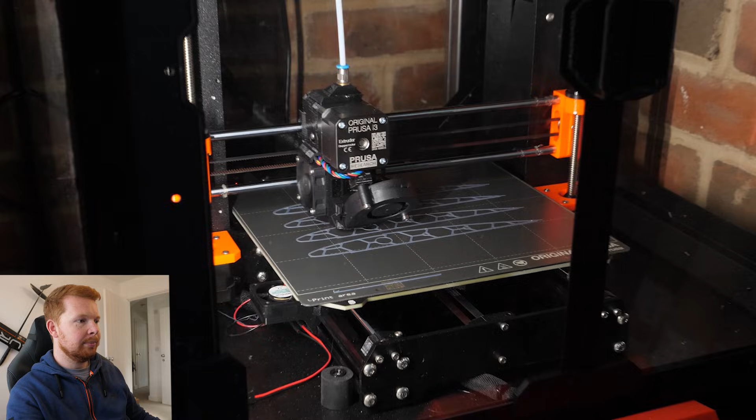Ever since then, I've wanted to build my own version, but a little larger. So I started 3D printing some lightweight aerofoil ribs. This is the first time I've printed with ABS in probably 5 or 6 years, and I was very surprised how well it printed on the Prusa Mark III in the enclosure. I didn't need to put any acetone or ABS sludge on the plate, which is what I had to do back in the day.

A lot of people were asking in the comments why didn't I use lightweight PLA? The main reason was the temperature resistance for when I iron on the covering film. But also, lightweight PLA is a lot more bendy and a lot weaker than ABS. I think it depends on the structure - if I was printing a more solid 3D part rather than a plate, then maybe lightweight PLA would be better. But for this, to reach the same amount of strength, I'd have to make the structural bits a lot thicker, so in the end it would probably weigh the same as the ABS.

Because if I printed this rib out of lightweight PLA, it would just be way too bendy. I have one of the test ribs here, see how bendy that is in ABS. If that was out of lightweight PLA, there's no way that would be strong enough. Good thing is with ABS as well, it flexes quite a bit before it breaks, which I think probably helped it during the crash at the end of the video.

Spoiler alert. ABS plastic that will make up the internal structure of a...

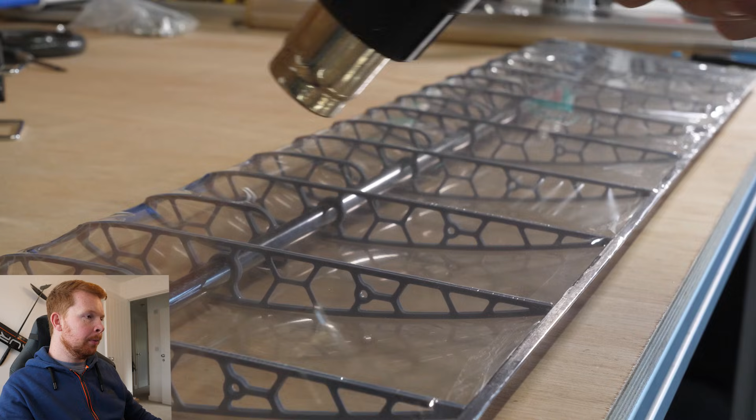Once ironed onto the ribs, a quick blast with a heat gun will shrink the film down to create a smooth wing surface. But there are some issues. The first being the ribs at the wing tip bend inwards due to the tension in the covering film. And this tension also causes the airfoil to shrink between the wing ribs, making an inconsistent profile along the wing span. Plus, I may have held the heat gun in one position for a little too long, causing the covering film to melt.

I just want to talk about wing design quickly, as this is the fourth air-powered plane I've attempted to build and fly. The first plane I built was actually the heaviest, but it isn't the heaviest now - this latest plane is actually heavier than that first version, which has a 2 meter wingspan as well. The reason for it is these wings are actually heavier than foam wings.

I reckon one of these wings is about 99 grams, just under 100 grams, so nearly 200 grams for the whole 2 meter wing. But I reckon I can build a foam wing that's lighter - I could probably shave off 50 grams. I reckon you could make a 2 meter foam wing with a 20 centimeter chord for 150 grams or less, maybe.

But the foam wing is very difficult to get a really accurate airfoil profile. So the reason why I went with this one, first of all, is because it looks cool, which for YouTube is important sometimes. But also the airfoil profile - I was hoping it was going to produce much better performance. It would be interesting to see if I made this wing as close as I could to the same profile but with foam, to see if it would fly, and if it would be much lighter and then potentially fly longer.

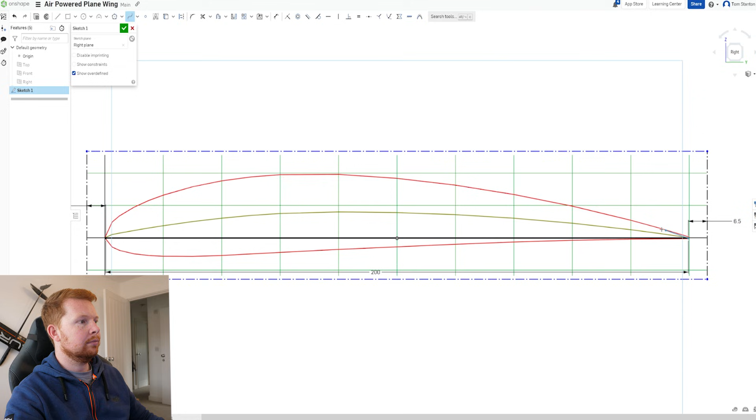To fix the issues caused by the covering film, I decided to use a thin sheet of balsa wood to reinforce the leading edge. This stuff bends really easily, and if you take it outside in the British weather, it'll bend even easier - so much so that I could bend it round a 3D printed mould of the wing and pin it in place until it dries.

Once dry, it holds the curved shape of the leading edge, and I can print some new ribs with a small step where the balsa will mount to. I then gave the wood a few coats of bright orange paint to make it look nice, which gave me some extra time to build a new wing structure.

This new wing is similar to the previous one, but has much thinner ribs, as I'm hoping the balsa wood will add some strength. It was a bit frustrating that I had to add these rods - it's part of the structure anyway, but I had to add these thin 2mm rods. They don't weigh a whole lot, maybe one of these is like 3 grams, so about 6 grams for 2 of them. I'm not sure, I can't remember.

They don't produce any span-wise strength along the span of the wing. They're literally just for compression reasons, to stop those wingtip ribs bowing inwards from the covering film, which is kind of annoying. You wouldn't need it on a foam wing, but I guess it's just a necessary part of the wing structure, as well as some thin carbon rods to prevent the wingtips bending inwards.

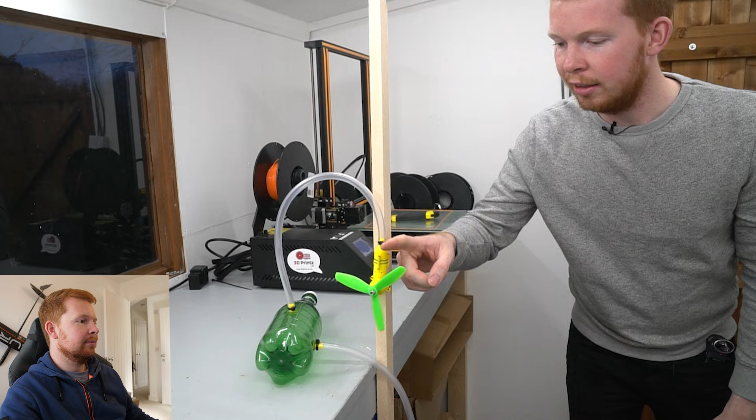Fortunately, I've been developing 3D printed air engines for a while now. I find it so funny watching this old footage back - I know I include it in quite a few videos, but basically that first version engine I managed to get running one evening. I blew into the top of the cylinder head, and it managed to run, and I was like, I need to quickly get some footage of this. So I grabbed that drinks bottle from the cupboard, cut 2 holes in it, glued some pipes to it - the absolute worst way to use a bottle as a pressure chamber. I didn't pump it up above 30 psi or so because I was scared it was going to burst at the holes I'd cut. Then the engine was attached to a random stick with some wire. But yeah, it's just funny looking back at that.

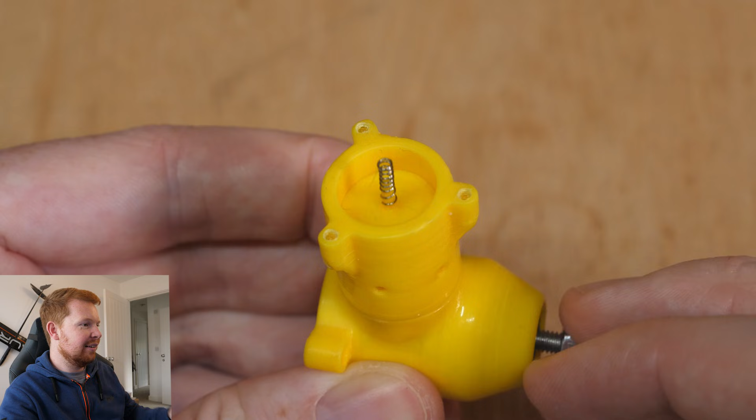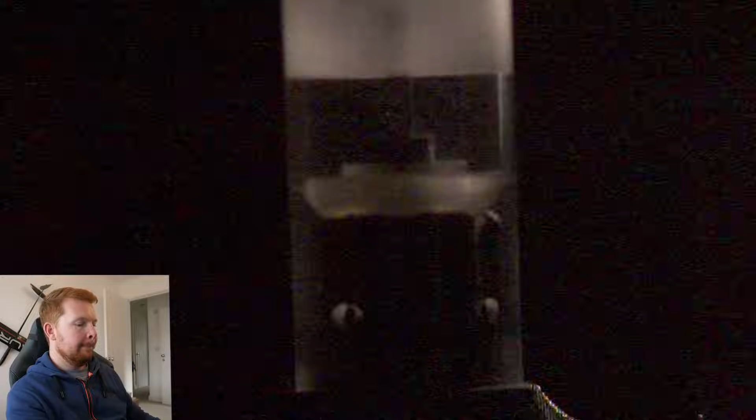I've tried many different designs such as spring-operated inlet valves, cam and pushrod valves, diaphragm actuated pistons, and the latest design that uses a custom moulded piston seal that expands under pressure to make the piston airtight, very similar to the Airhogs engine. This engine has been a huge step up in performance compared to my older designs, producing 350 grams of thrust from an engine that only weighs 40 grams.

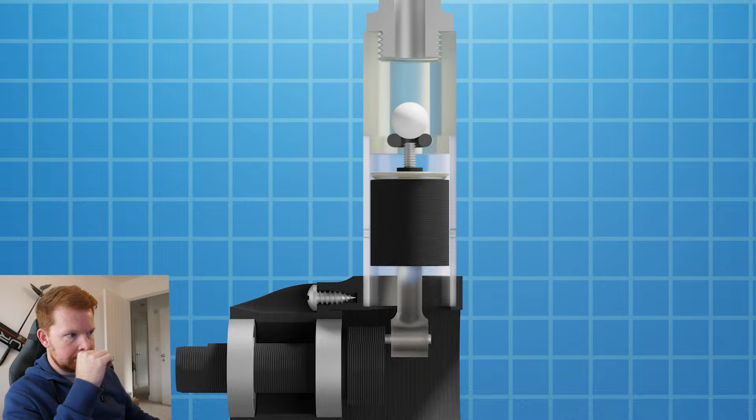The engine is very simple with only a few moving parts. High pressure air flows in through the top of the engine and is sealed by this ball bearing. Then as the engine turns, a small pin on top of the piston moves the ball upwards, opening the valve.

I do want to try build an engine with a slightly different piston seal. The reason is the seal contracts when the piston goes up, so there's no compression pressure, but when the piston's going fast enough, I'm sure some air gets trapped - it can't flow around the piston quick enough. So it'd be quite cool to design a piston with a smaller diameter so more air can flow around it, maybe like on this design where I have channels down the side of the piston. It might be quite cool to print those so loads of airflow can come around the sides with no compression as it goes up.

I'd also want a seal which shrinks more, so the expansion is a lot more, meaning the upward stroke has zero or hardly any resistance. Although I don't think it has a whole lot of resistance currently, if it saves a couple of percent here and there as the piston's going up, it could increase the thrust a bit, or the efficiency.

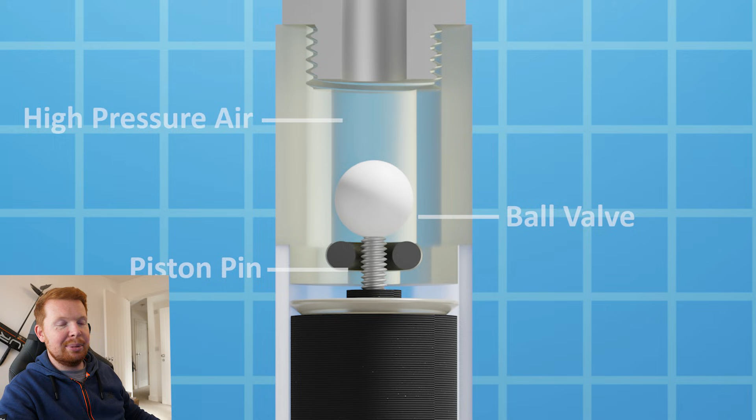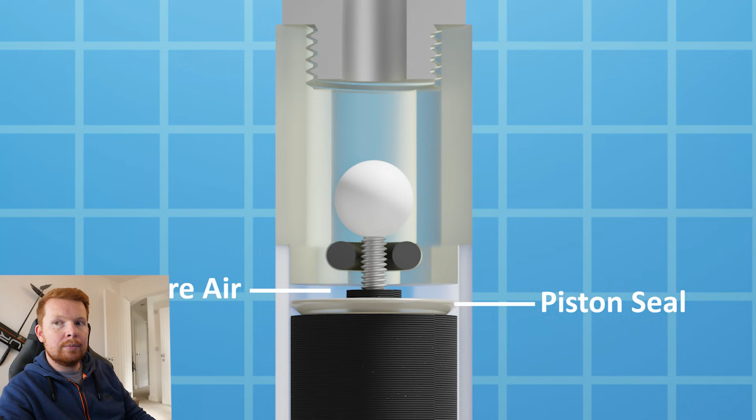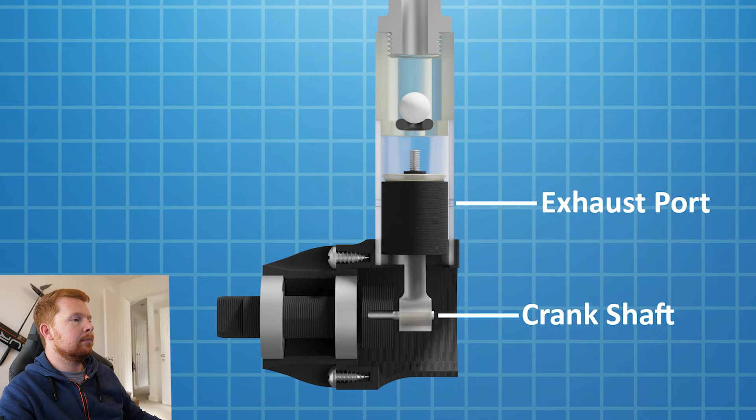High pressure air fills the cylinder, but this seal on top of the piston is a vital component to the engine's efficiency as it expands due to the pressure and seals against the cylinder walls. This causes the pressure to push the piston down, closing the ball valve and turning the crankshaft. Then as the piston reaches the bottom, the air flows out the exhaust ports and the seal contracts, removing any compression as the piston travels back up.

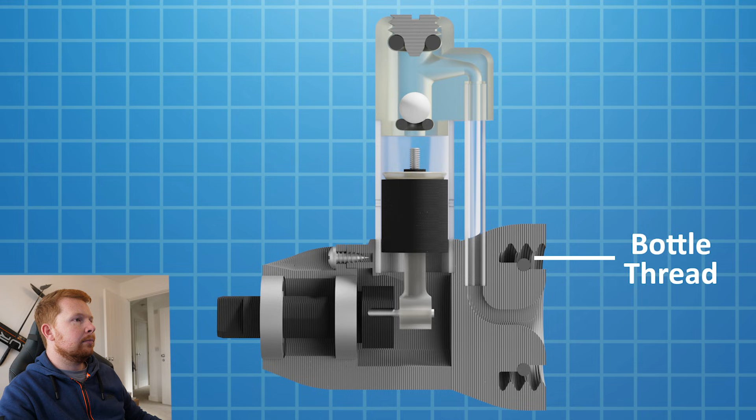Now the airworthy version of this engine is slightly different, but works exactly the same. It just has this 3D printed thread to attach to a plastic drinks bottle, and the air flows up this thin tube into the cylinder head.

I also decided to buy a high quality propeller to hopefully maximise the thrust output. The main reason I bought it is that it's a much more efficient shape than the one I use on the thrust test stand and on my older planes. But also, once the engine is flying versus just stationary on a test stand, the airflow reduces a lot of the load on the engine, so the RPM speeds up a lot, because instead of trying to just accelerate stationary air, it's got airflow moving into the front of it.

So I bought this propeller because it's 16 inch, which is 1 inch larger than the one I use on the test stand. It's also got a 6.1 inch pitch on the blades, which is a lot more - I think the old one is maybe a 4.5 to 5 inch pitch. So having a 6.1 inch pitch, I was hoping would keep a similar load to when it's stationary on the test stand.

Hopefully that'll keep it producing similar amounts of thrust. But yeah, I just thought it would probably be good to get a decent propeller as well, rather than spend all that time making an efficient engine and then put a rubbish $5 propeller on it.

Surely the fact that this propeller comes with its own socks must mean it's good. I can't remember how much the propeller costs - I think it was like £50 for a pair, so £25 each, what's that, $35? Which isn't a whole lot of money, but it is a lot for just one propeller. They are super lightweight though, I think it only weighs like 15 grams, which is really, really cool. So I'm going to look after them and keep them in their socks.

I know many of you are thinking, why don't I use CO2 cartridges instead of plastic bottles, as they can store far more pressure? Well, this CO2 cartridge is pressurised to about 800 psi, or about 54 times atmospheric pressure, which is a lot, but its volume is very small at just 21 millilitres. So if we let the CO2 gas flow out of the cartridge to equalise at 1 atmosphere of pressure...

Now, I made a mistake in this, and I'm really annoyed that I didn't notice it earlier. But basically, I realised after everyone started commenting, the CO2 cartridge holds liquid CO2, not gas CO2. So my calculations here of it being directly proportional to the pressure and the volume is not correct. When you expand this, which is a 16 gram CO2 cartridge, the gas expands to about 9 litres, not 1.1 litres. So it's about 9 times better.

Even with the corrected expansion volume of 21 millilitres up to 9 litres, the fact it weighs the same as the bottle when pressurised, about 62 grams, and the bottle has 16 litres - although my calculations were wrong in saying that the bottle was 14 times better, it's still nearly 2 times better, like 1.9 times more volume per gram. So yeah, I did make a bit of a stupid mistake in this part of the explanation, but the bottles are still better at the end of the day.

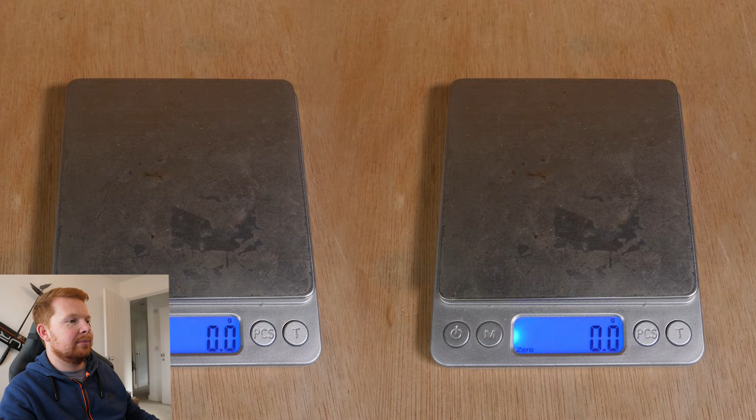This means we'd need 14 CO2 cartridges to equalise the storage capacity - so we wouldn't need 14, we would need 2 canisters to equal the bottle capacity of the drinks bottle. And considering the single cartridge weighs more than the bottle, the air storage to weight ratio is over 14 times greater. It is quite interesting though, when I calculated when the bottle's pressurised to 120 psi, it adds 20 grams of air, which, because I had 2 bottles, that's 40 grams of air, which is quite a significant amount.

I don't actually have it here, but the onboard camera that I mounted on the plane weighs 35 grams. So that weighs less than the air that's inside of the plane, which is an interesting little fact for the drinks bottle. So moving to CO2 cartridges would be a huge downgrade.

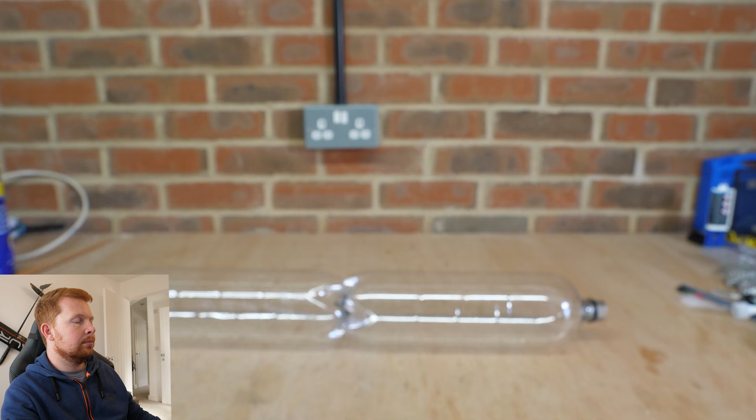So to increase the runtime, I'm going to mount 2 2-litre bottles back to back using a nylon bolt. This requires drilling out the underside of the bottles, which is the thickest part and shouldn't reduce its strength by much, as well as hollowing out the nylon bolt.

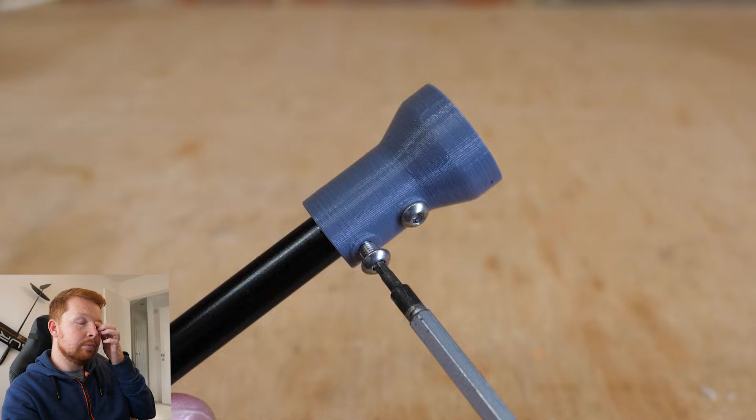But in order to attach the bottles together, I need to get the nylon bolt inside of the bottle, which requires cutting up an old arrow shaft and attaching a 3D printed socket, which perfectly fits the bolt and just squeezes through the bottleneck. This allows me to sandwich a large rubber washer between each bottle before tightening it down with a nylon nut, which should hopefully create an airtight seal.

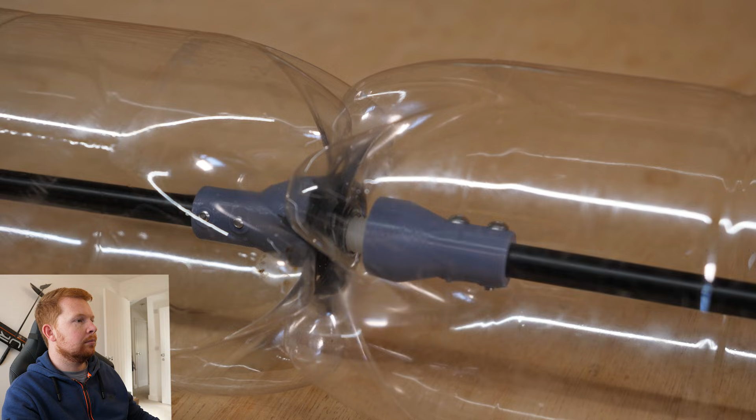But before we test it for leaks, we need a way to pressurise it. The design I've come up with is a 3D printed bottle cap that has a small ball valve inside. And to fill the bottle with air, I can use this hose with a 3D printed latch attached.

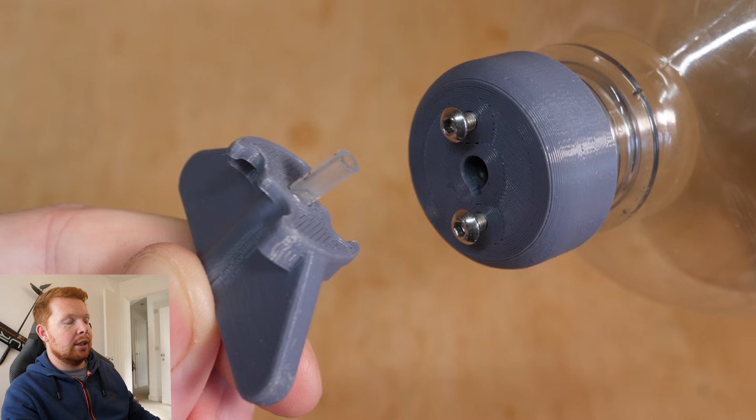So a couple comments were asking why didn't I just use a regular bottle cap and a bike valve, like a Schrader or a Presta valve. The reason is that I find bike valves just a bit of a pain, to be honest. Obviously that would be much easier because I wouldn't have to design all this latch and everything. But when you try to get the bike pump onto it and wiggle it on, then latch it and pump it, the air flows really bad if the pump isn't properly pushing the valve open. So you can't pump as fast, and it sometimes leaks. Then when you gotta get it off you gotta wiggle it off, and I didn't really fancy any of that, especially when dealing with these high pressures, 100 psi plus.

When the bottles are on the ground, I literally just want to unlatch it and throw it. I don't want to have to fiddle with the bike valve when this drinks bottle is at such high pressure. So I designed this, and it plugs straight into the connector on my bike pump, and you just push it in and it works.

Let's do it. This hose fits perfectly through the O-ring in the ball valve, and the latch locks into the bolts with a small turn. Once the plane is up to pressure, I simply twist the latch, pull the hose out, and the ball should seal the air inside.

So I filled the bottles with water to reduce the potential energy if something were to go wrong, and pumped them up to 120 psi. I couldn't believe how much these bottles actually expanded when watching this video.

I think in both - what do you call it - they're not elevons on a V-tail. On both the tail stabilizer and control surfaces, I think I drilled 70 holes total. It took ages, with some splintering. And then finally with a 3D printed bit wrapped in sandpaper to make the holes nice and smooth.

This reduced the weight by about 20%, and after a few coats of paint, 20% was like 2.5 grams, I think. It was 13.5 grams to start with, and 11 at the end.

And there's 1, 2, 3, 4, 5, 6, 7, 8, 9, 10, 11, 12, 13, 14, 15, 16, 17, 18 holes in each of the elevator bits. And then I think there's one less hole in the control surface, so 17 in that. So 70 holes total to save - well, I guess it's 2.5 grams per thing, isn't it? So it saves 10 grams, I guess. Might have been worth it, I don't know.

It can be laminated with the covering film to stop air flowing through the holes, because leaving a bunch of large holes drilled in the tail of an aircraft would be a bad idea. I then added control horns and attached the control surfaces with packing tape, as it's lightweight, flexible, and sticks well to the covering film.

Now, I want this tail to be controlled via cables to keep weight away from the rear of the plane, so I used some spring steel wire as a torsion spring within the control surface. This idea isn't anything new, it's quite commonly used in gliders.

In fact, this is a discus launch glider. If you haven't heard about these things, they're amazing. You hold them on the wing tip like this with your finger, and you swing round and throw it like a discus, and you can throw it about 60 meters high. My record flight with this was over an hour. It got up to 200 meters high.

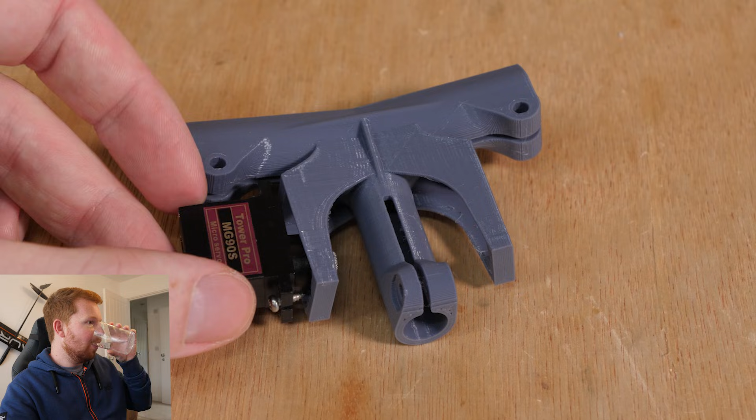I then printed this odd looking part that the tail boom will mount to, and I can attach servos here to control the tail, which works really well once the cables are attached. This central hub also mounts to the bottles with a flexible printed ring, and a small bracket on the tail boom to complete the plane's fuselage.

Now all it needs is the wings to be attached to these points, and we have a completed plane. Let's take it out for a test flight.

Right, we're at 60 psi, but I can hear a leak out of the rear bottle cap. It's not a good sign because I pressure tested this already.

What's funny is every air-powered plane video I upload, I get comments going, 'Tom, you need to do more exercise. You're always out of breath when you fly these planes.' And I'm like, 'Yeah, do you know how long it takes to pump these planes up?'

It takes... what's funny with the pump that I have is it's almost exactly volume matched to the pressure in the bottle. One pump almost goes up exactly 1 psi. Because I would count, I go 10 pumps, 10 psi, 20 pumps, 20 psi. So to get to 100 takes 100 pumps.

However, on this first test, the reason why I'm so out of breath on this is because the leak, above about 70 or 80 psi, was almost equal to the speed I could pump at. So I was just pumping as quick as I could. I didn't edit it into the video, but I was pumping as quick as I could just to squeeze the pressure up a bit. So it was pretty much just a cardio gym machine, but a bike pump version.

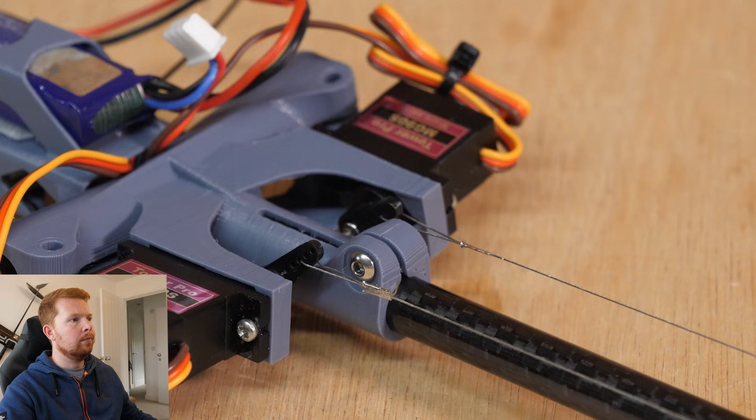So I fixed the wing with a small patch of tape and reprinted a new central hub, which I honestly reckon saved the plane when it snapped. I think the central hub did save a lot of the impact force. It didn't snap where the wings mount, so I guess it just removes the weight of the tail on it. And then maybe the bottles come loose as well because they're bolted to the tail.

But I do think I could have shaved a lot of weight off of the wings because they survive. It probably nosedived from like 4 meters up and landed directly on one of the wings. And the fact there's no structural damage apart from a little bit of film on the trailing edge, yeah, I probably could make them a bit lighter and weaker. And by the following day, it was back up and flying.

See, this shot is me trying to get the plane as high as I could. It didn't fly for as long though, because it takes forever to get up to that altitude.

I think it was on this day I was flying, and there were some thermals, and I managed to get it in a thermal for a bit, and it kind of went up, and then the air started running down, so it was just gliding, and then it got into, I don't know the name, but where the thermals sort of go up, there's a down bit as well on the outside, then it goes up. I fly in thermals quite a lot with the discus launch glider.